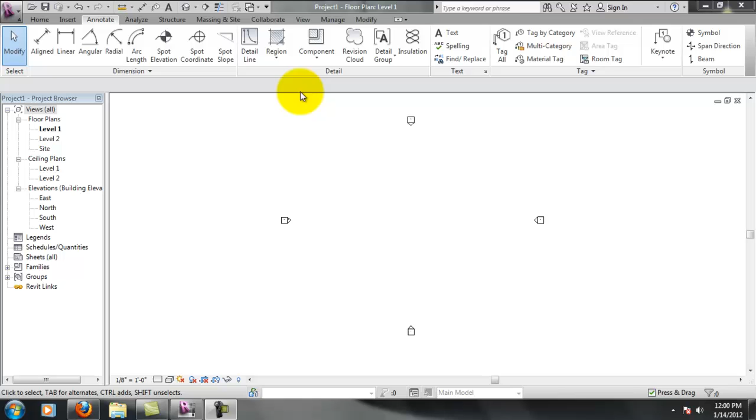So to start off, we're going to create our grid. Like I said, interior designers often won't have to create a grid, but there's going to be a grid to work off of. So as long as we're in this class, we'll probably always create a grid just to get familiar with it.

So I'm going to create some lines here. Let's see, I need... need 7 total. It looks like we only have 6 so far, so I need 1 more. There we go. So I need 7 this way.

We'll space them later. One thing I want to point out is this elevation marker needs to be pulled out now that I've expanded my workspace. So it's good to not get that trapped inside of your space. It's just, it's not a good approach.

You want to pull these guys out here, kind of align them again to recenter. We're probably going to have to move these once we add the other horizontal ones, but for now I'll just get them there. So this doesn't have to be perfect, right?

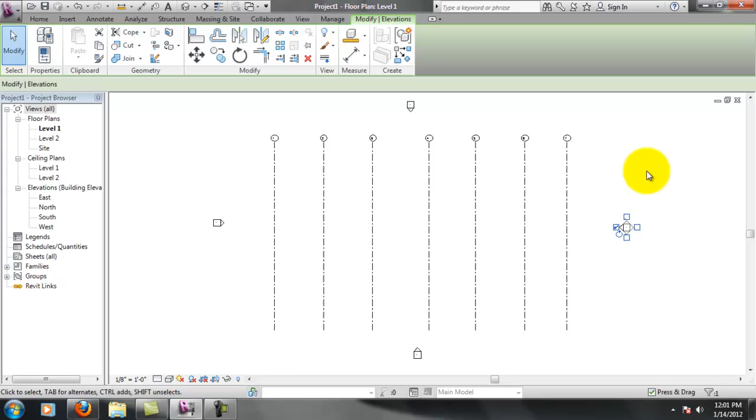Because an elevation, if let's say that this was a wall, an elevation marker is going to show the length of this wall no matter where it is, and it's not going to be offset. So technically I could have this here and it would achieve the same result as being in the center. However, drafting standards make it to the point where you kind of want to keep things nice and neat and in line.

And you can see here by selecting the triangle, this tells me where my view starts and ends. So anything within this area is going to be seen, and we'll focus on those a little more later. So I've got 7 of these here. I'm going to go ahead and space them.

Remember, with the first grid line, you're going to just go ahead and pin that in place because we don't want it to move. So everything's going to be based off of this point. I told you before that Revit doesn't have a coordinate system. So if we pin this, let's just go ahead and say, hypothetically, now this is our 0 on the x-axis, okay? This is our 0 point because we're basing everything off of this point.

So now I can come in here and I've just already decided that I'm going to make these 25 feet. And then I'm going to pin the second one so that it doesn't move anymore. And I'm just going to go down through here and make these 25 feet. Make sure you pin them.

I know it's hard to remember to do it because I still sometimes get in the habit of keep moving and I'll forget to pin stuff, but you really want to make sure you lock stuff in place after you create it. Either pin it or lock it.

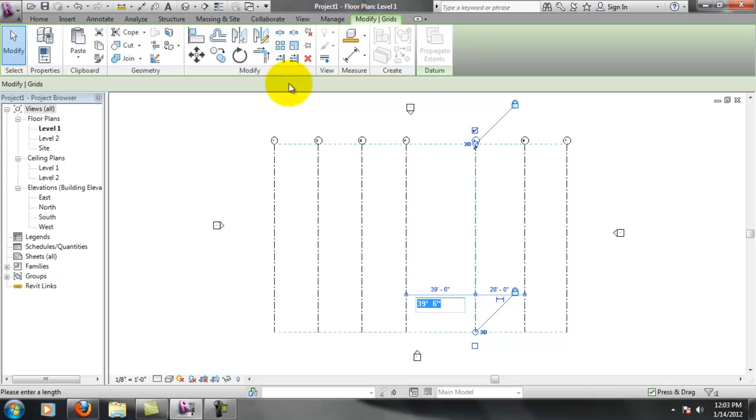All right, see, I get that one. So there's one thing here that I don't like about my bubbles, and it's not necessarily wrong, but it's also not necessarily right.

That's going to depend on who you work for. But I like the bubbles to be along the bottom and up the right side. So I'm going to select each one of these and hit my check mark. Remember to bring my bubble down here, and then I'll uncheck the top one. So you can see that moves my bubble down here, which is a little more easy to read, I think.

So I'm going to uncheck all of these and go down through here and move these down here. Oops, let me get that guy there.

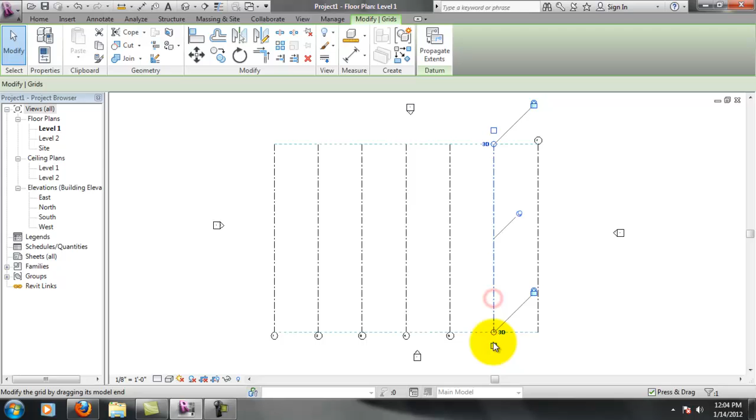Alright, so we've got these set up now, 1 through 7. They're spaced correctly, so now I need to go ahead and do the horizontal ones. And to keep this project simple, we're going to work with a square building.

So I'm just going to go back through and do the same thing and create my horizontals here. So grid lines again. This time I'm going to make sure that my bubble is placed correctly on the right side, so I don't have to go back through and check it. I wanted to show you that you can do that if your bubbles are on the wrong side. It's an easy fix, it just saves the extra time by going this way.

Now also notice these are counting numbers. In order to save even more time, I'm going to undo these by hitting Control Z. Control Z is going to back me up to this step.

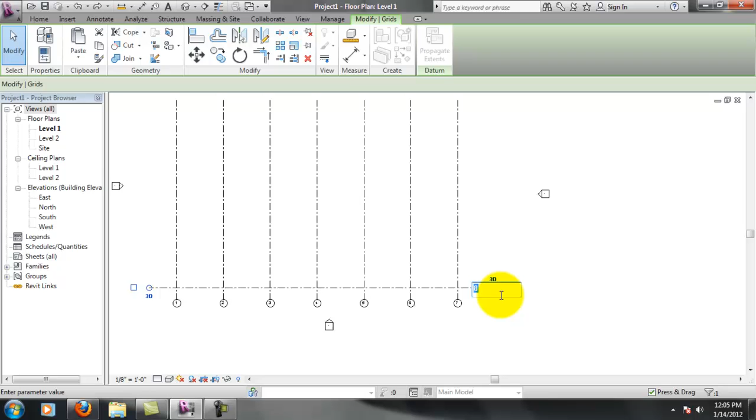Right off the bat, I'm going to go ahead and name this, I'm going to give this the letter A. And now I'm going to actually start again. And you'll see why I decided to name the first one A.

If you remember from last week, it's going to automatically go with letters now. That way I don't have to click on each bubble after I'm done creating these and change the letter. So by undoing it and stepping back there, it kind of saved us a little bit of time.

One more. Okay, so now I'm going to go ahead and make this grid line. I'm going to pin it in place. Okay, so now I've pinned this in place and I've pinned this and this grid line here in place.

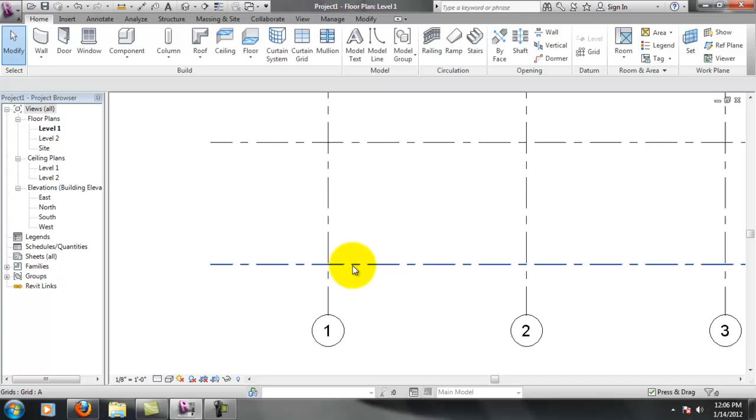So technically, you can consider this for your drawing. Now you're not going to be able to ever enter any coordinate numbers or anything like that, but for your own reference, think of this as 0,0, where these two intersect. This is the corner of your building, or what will be the building. And these are also locked in place, so we can assume that every dimension that we do from here on out is actually going to be based off of these two points.

So yes, Revit doesn't have a coordinate system. Yes, we can kind of create our own here in our own little relative world as far as the rest of this drawing is concerned. And that's one of the good things about grid points.

So we've locked this in place. We're going to make these 25 feet. Remember, you pin it after you move it. This will be 25 feet.

It looks like we're going to overlap here. I need to pin this one. I'm just going to kind of move these, click and drag. Alright, as I get this one, we got this one, so this next one, 25 feet, same thing. Pin it.

Okay, we're going to move this. Click and drag to move them. We want to make sure that they stay in line here at the same time. We don't want to get anything out of order. We want to stay nice and neat. That's the idea of a technical drawing, is to stay nice and neat.

Looks like I forgot this guy here. Now, the beauty of this is I already locked this 25 feet. Well, I pinned it, I didn't lock it. So we're still going to have to unpin that if you've pinned it. And you're going to have to move this one and then pin it separately. I was going to say if I had locked the dimension, it would move with it, but I didn't take that approach. I actually pinned it, so we'll have to redo this one.

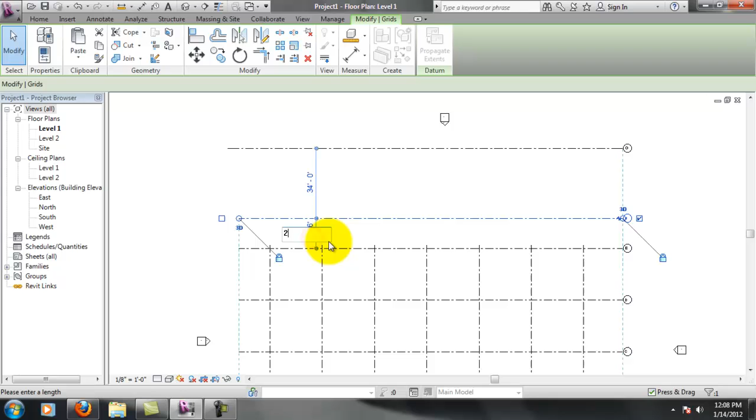All right, so we've got these pinned in place. Obviously these are showing up a little short, so what we can do here, if you remember, I'm not going to be able to drag that. I need to drag it, but if we've pinned these in place, it's not going to let us do that. So I'm going to select all of these and unpin them for a moment.

And I'm going to select this first one again. Now you can see when I select this first one, there's a dashed line that comes across here. That tells me that if I move this one, it's going to move all of them, which is good. That's what we want. So I'm going to move that up so that it overlaps a little bit. Doesn't have to be a lot. That'll work. And then remember, after we do that transition there, we need to select everything again.

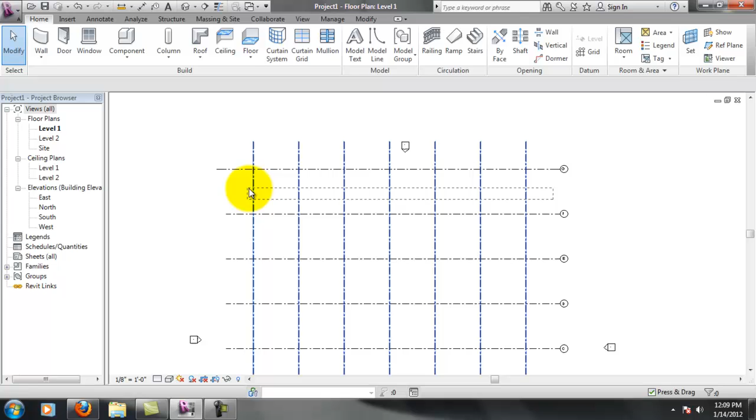I did that by dragging a box across all the elements that I moved, and I'm going to pin those again. By selecting everything at the same time and hitting pin, that'll let me drop that pin there.

Now I need to move my elevation marker here out of the grid. I'm going to select this and hold Control and select this other one, and move both of them at the same time. Let me zoom in there. Move this over to here, just to get it out of the way a little bit.

And you can see here on this right side, this isn't lined up here, and we want to make sure that that stays nice and neat. So I'm going to unpin this first one and move that over to the dashed line. Shows me that they're all in line, and then I'll repin it again.

Alright, so this is our grid line. You should have your grids 1 through 7, and then A through G, and that should be nice and neat. Your elevation markers should be somewhat centered and a good space away. You want to keep those out of your grid — they'll get in the way later. So the next step, we'll come back and focus on starting to create some exterior walls here.

Alright, so we have our grid lines created, which is good. This is going to give us our reference for where our wall placements are going to go.

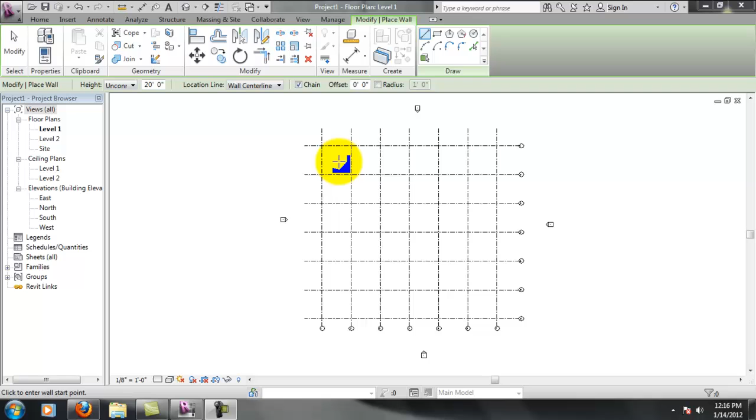So if you remember, to add a level, you can't do it in a floor plan view. If you think about it, it would be kind of hard to add a level in the floor plan view unless you drew some kind of square and specified a distance from the ground, which gets messy. So Revit protects you in that sense and makes you go to an elevation view or a section view to create a level. So I'm just going to pick either one of these elevation views.

These elevation views correspond to these markers. So if I were to double click on this, it would give me the same effect as clicking on the north elevation, the east elevation, or the west elevation. It's important to remember that these elements correspond to the views over here.

It's also important to note that by default, Revit already gives you 2 levels to work with. So we're just going to add 4 levels onto the 2 levels that we already have. I'm going to go to an elevation view.

And you'll see that my grid lines are projecting up, okay? These represent the grid lines that we just created. It looks like our levels actually need to be moved over, so I'm going to drag that over. If your levels aren't appearing on the right side like that, you want to make sure that everything has an intersection here — that would have been bad for that not to be all the way out here.

And also we know we're going to add more levels here, so we're going to drag these guys up. Now remember, they're pinned because we pinned them before, so I need to select all of these and unpin them before I can move them up. So I'm going to unpin all of these again. And it's okay that you have to unpin and pin things.

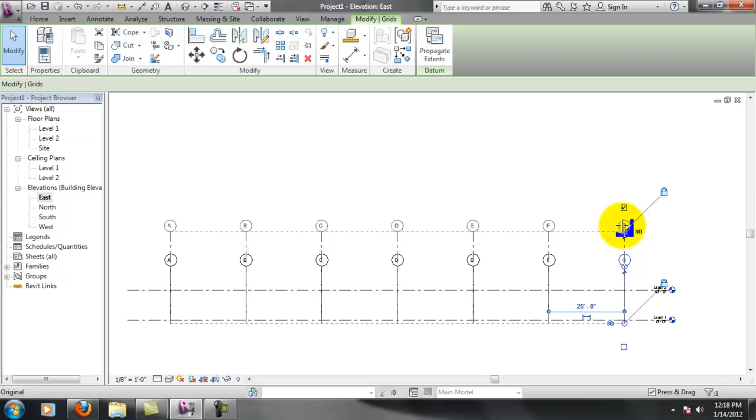That just shows that you're being conscious of what you're doing with your objects, keeping a close tab on being able to move them and not being able to move them. But you just need to make sure after you unpin something, you go back and pin it again.

Now to add a level, I go back to the same place where the grid was, right above grid. Here's level, I can select level. Remember, the first place you click is actually not the bubble, it's the tail, and then you drag towards the bubble. So I'll come over here and drag towards the right. Make sure you get that extension snap there, it'll save you some alignment time later in the future.

Like I said, we're going to go up to 6 levels here, and we're going to have to make adjustments on the height. By default, these are at 10 feet. I actually want my levels to be 12. Well, the first level I think we'll do some kind of opening later, so we'll go ahead and make this first opening 20 feet.

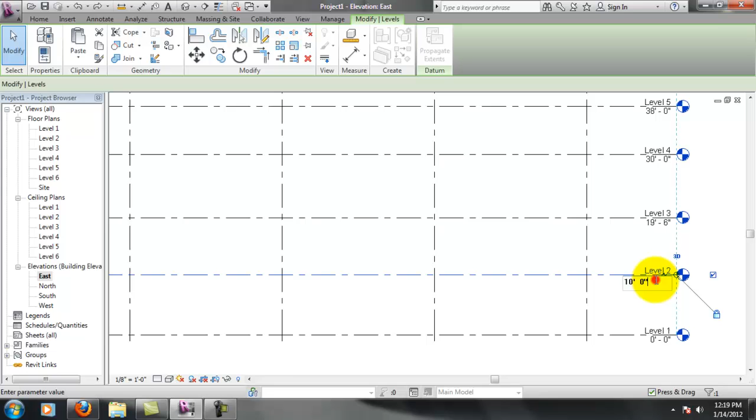And it went over top of our other level there, so you have to be cautious of which one you move next. So I'll drag this one above level 2 there. And it looks like we're going to need a lot more space, so I'm going to click all my bubbles once again, unpin these, and select this first one and drag it up. Drag it up to there, and I'll pin these in place.

Looks like that's the space we're going to be dealing with, so we're here now. This might be alright. I'm kind of just trying to limit the amount of times we have to pin these things, because that could get to be kind of tedious and unnecessary. So I'm just going to drag these up here and space them so I don't have any overlapping issues later.

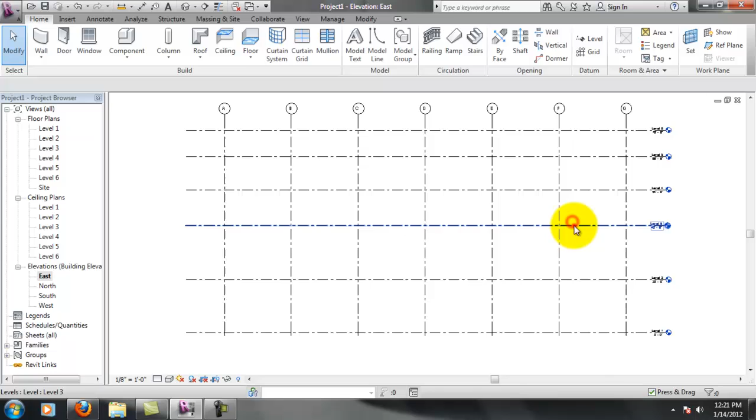Alright, so my first one should be still at 20, and it is. After I get it at 20, I need to pin it. Remember, we need to pin our levels as well. And this next one, from here on out, we're going to stick with 12 feet in between these. So I'll nail that at 12 feet and pin that. And 12 feet, pin that. 12 feet and pin that one, and then last but not least, 12 feet and pin that one.

So I'm a little high on my grid lines, we can clean these up here later on. We might add more levels, we might not. We definitely know that this isn't the final drawing, so as far as this overhang and this overhang is concerned, I'm okay with this. Plus we're going to have some walls added on level 6, possibly, so we'll leave the overhang here quite large because we don't know where we're going to go with this. Other than that, everything looks pretty good here. I want to make sure everything's pinned before I move on, and it is.

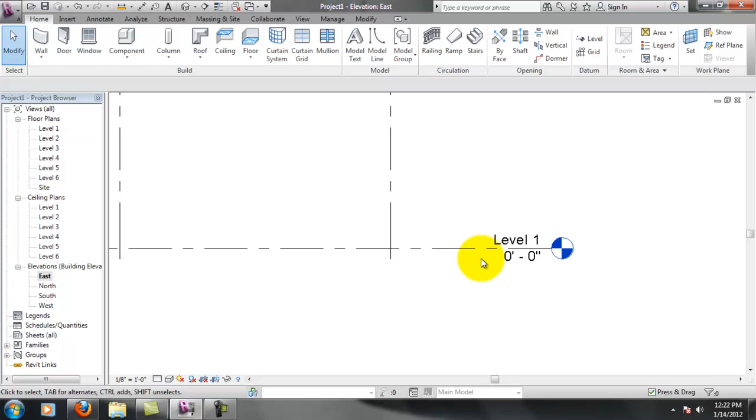Now let's take a look at these datums. As you can see here, level 1 corresponds to level 1 over here in floor plans, and that tells us that right now we're at 0 feet, 0 inches. Now if I select this line, we have more options. Obviously the checkbox is going to control the datum. Remember how we had our grid lines? This checkbox does the same thing. So if I turn that on and off, if I wanted to put the datum on the other side, I could do that.

This guy here creates a break. If I had a bunch of levels that were close together and I needed some space, I could break the line there to bring that out. If I want to bring it back, I just drag it up until it's straight again, and that'll reset that. And this little circle moves it forward and back, as we experimented.

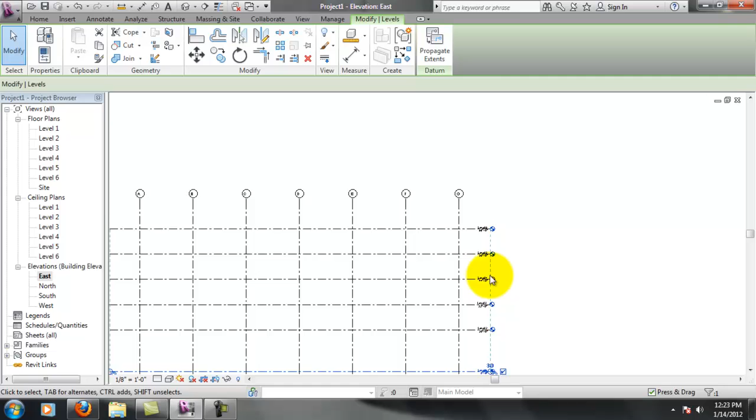Now, because of the naming system, it's going to automatically name levels 1, 2, 3, 4, 5, and 6. And the dimension underneath it corresponds relative to the ground level, or level 1. So this level is 68 feet from level 1, and so on and so forth. These dimensions correspond to the dimension from this level to here, so 20 feet from here down to level 1.

This is 32 feet from level 3 to level 1. So it doesn't have to do with the spacing here, it has to do with the spacing from the level to the ground level, or level 1. And we're actually going to go ahead and rename this level 1 now to ground level.

You can do that by clicking on the tag and just typing ground level. It's going to give you this message: would you like to rename corresponding views? What this means is I've renamed my level 1 here, but I have a level 1 over here and a level 1 over here that correspond to this level. So if I rename this, Revit's asking me, do I want to rename everything that corresponds to it?

Obviously your answer here should almost always be yes, because you're going to have things named differently that correspond to the same level. So when you get this message, 99.9% of the time you're going to want to just hit yes. And by doing that, you'll see that it renamed this level to ground level and this level to ground level. So we're staying organized here by making sure everything corresponds to what it should.

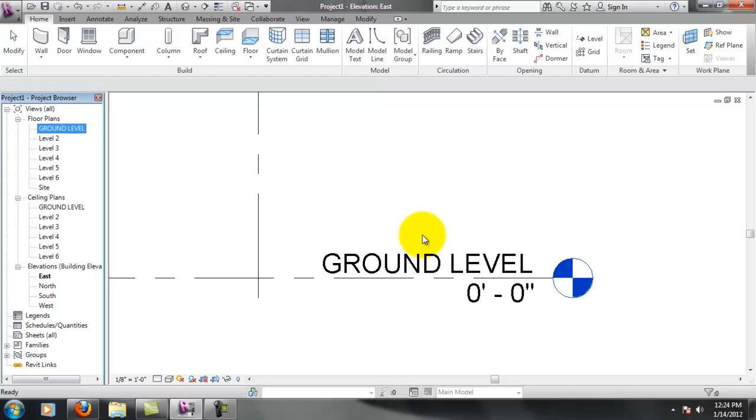I think what I'll do, I'll actually name this, it doesn't really matter, we'll name it ground floor for now. So ground floor, ground floor, ground floor. And we'll go through here and name this first floor. This is actually, we were thinking about putting a mezzanine in. We can rename these things later. We'll just name that first floor for now.

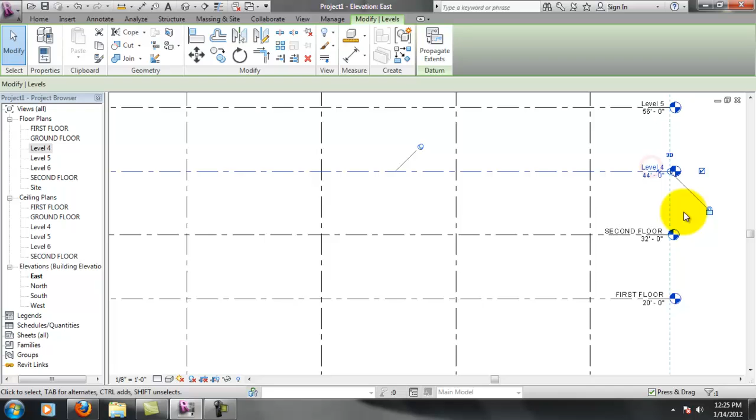Second floor. Notice as I go down through here, these are renaming. I could just as easily say that I want my third level, which is actually, I have a ground level, first floor, second, so my numbers are off, so I want my level 4 to be the third floor, right? So instead of clicking on the name here to rename it, I can just as easily come over here and hit rename, and rename this third floor.

Enter, and that's going to ask me that same question, and you'll see here that it automatically updates. So these guys are linked, the names of these things, the properties of these things. The names in the project browser represent the objects out here. So either way, the next one, we'll name this fourth floor.

And yes, and you'll see it updates that. And last but not least, level 6 is going to be the 5th floor. So this time we'll rename it out here, maybe.

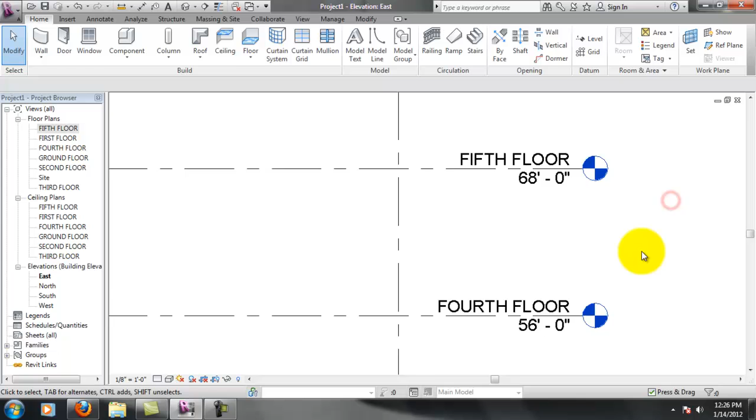Okay, so we've renamed our elevations now. We've renamed our floors over here. This will allow us to easily navigate, since we are starting with the ground floor and not a first floor. Now we know what floor represents what, and we don't confuse ourselves. So we pretty much took the time and set up the drawing with grid lines and levels ahead of time. So now when we need to draw walls and elevations and such, we know where we're headed. We don't have to stop and think about wall heights or anything like that. We know exactly where we're headed with this skeleton type system of grid lines and levels.

Alright, so we're ready to add some walls. We've created our levels, we've created our grid line. I'm going to go to the ground floor. And our grid lines, everything's still in order here. Everything looks good. Everything should still be pinned. Everything's left right where we put it. So looks like we're pretty good there.

So to add the walls, we're going to go to the wall command. And Revit is actually doing a good job to tell me that I haven't saved it. So if you haven't saved it, this reminder will come up at certain time intervals. You can change the time intervals here by setting reminder intervals. You can go ahead and save the project, or you can save the project and set reminder intervals.

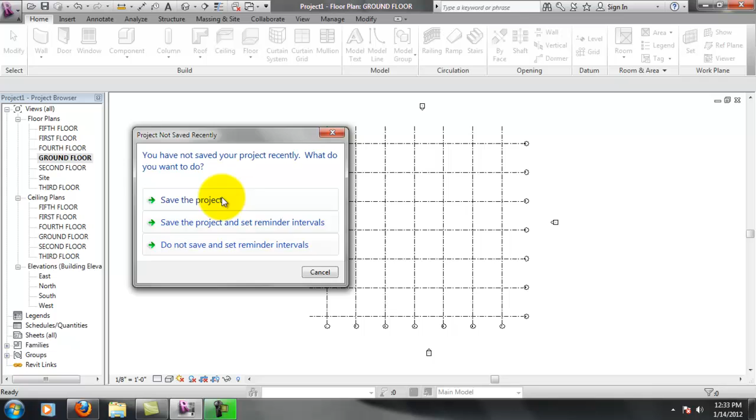So I'll go ahead and save this project now. Let's see, we will save it in... and hit save there. Okay, so thank you, Revit, for saving me in case the computer crashes.

That's always helpful. It's always good to remember to save every once in a while, but when you're having so much fun, it's hard to just stop and hit save every once in a while. But try and hit save as often as possible.

Especially when you're working on public machines, you never know what kind of shape they're in. Any computer in general could just crash at any given time, so it's important to save as you go along.

Moving along, we've selected wall. If you remember from last week, whenever you go into a command, your Modify tab turns green, and it highlights the screen green anywhere that has to do with a property for this wall. All of this has to do with creating a wall, and we'll hit all of it throughout the semester. The most important areas are this green bar here, and for the wall command, what's going on in here.

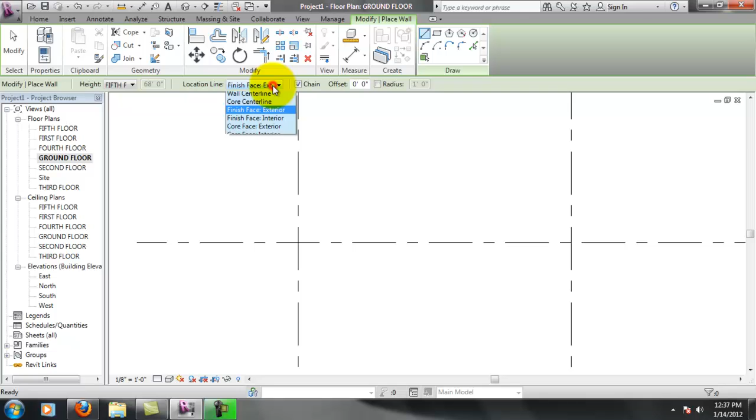For this project, I've already sketched out on a piece of paper the way I want my walls to go, so I'm just going to trace around here. I've made it nice and neat so they happen to connect at certain points. Follow along best that you can.

One last thing you're going to want to check - I close my properties, not because I don't like my properties, it's that I don't like the properties window taking up my screen real estate. I do like my properties, obviously - properties are what control everything. I just don't like them on my screen when I definitely don't need them.

Right off the bat it tells you what kind of wall you're drawing. If you select this, it will give you a list of what are system families of walls, and these can be modified. You can create your own off of existing ones if you want to.

You can't get rid of these wall types. These are there by default, they'll always be there. You can see we have exterior walls to choose from here, which would probably be what we want to use later on when we're a little more experienced. But for now, we're just going to stick to the generic 8-inch wall, to represent our exterior wall.

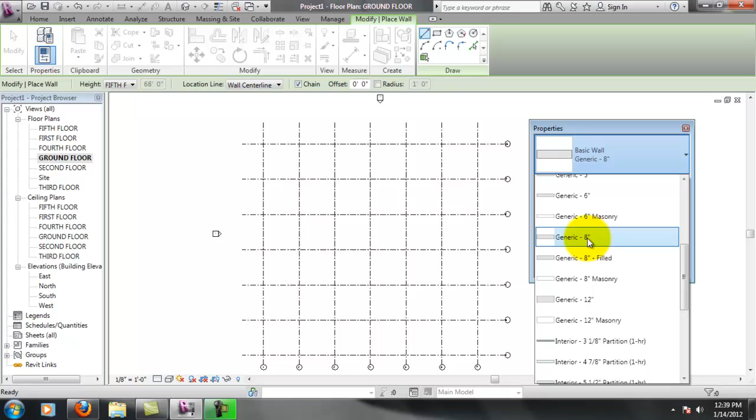You can also see there are some interior walls here, which we'll start to use later in this video when we get to the inside walls. So for now: exterior walls, generic 8 inches. This other stuff is okay by default for now; we'll come back to that later.

So I'm just going to start drawing my predefined shape here. This is a rather large building, so I decided to do some ins and outs for the exterior shell.

If you can imagine the way I pictured this building sitting, maybe in a downtown situation where it's set back from the sidewalk—so you have your city sidewalk, and this is a corner of a major intersection or something. That's the kind of context we'll be looking at for this building throughout the project.

Later, once we learn more tools, maybe we'll sketch the site in, depending on the time frame we have. For now, we'll focus on the insides of the buildings, which is the most important part for us.

Obviously nobody wants to walk up large amounts of stairs, so I decided to throw in a small shell here with a couple of elevator shafts. We'll put those in the center here.

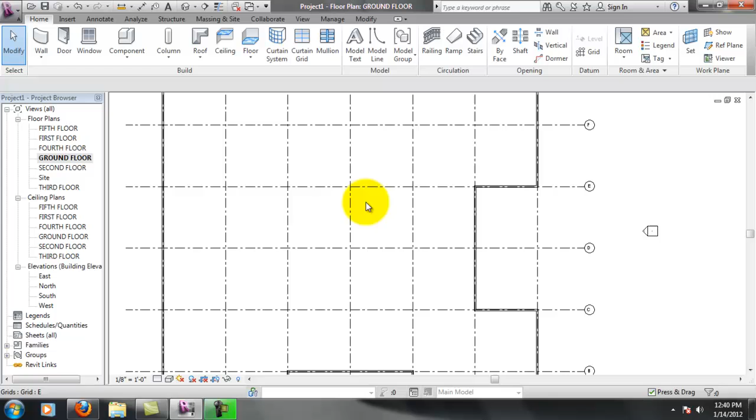Again, I'm going to use the same wall type, the generic 8-inch. You'll see, because I have it on wall center line, that's spacing the grid line in the middle, which is okay for what we're doing here—that's what I want for this drawing. So there you have it: the exterior walls and the shell.

Now, because we set the height right off the bat to the fifth floor, if we jump over to an elevation here, you can see that wall goes all the way up—the core in the middle and that exterior shell go all the way up to the 5th level.

The wonderful thing is, if I decide to budge this—if I unpin and select my level here, and change my height to 70 feet—you'll notice the walls go with it, because when we said we wanted to go up to the 5th floor, Revit automatically locked those walls to that level. So now whatever happens to this level, the walls move with it.

This is considered parametric data, and it's one of the strong things about Revit when it comes to families and linking things like grid lines. In AutoCAD, you couldn't do that—well, correcting myself, the new AutoCADs are introducing parametric data, so I can't speak for how strong that is yet. Revit was definitely there before AutoCAD with parametric data, so wherever I move this 5th floor, as long as these walls are connected to it, they're going to go with it.

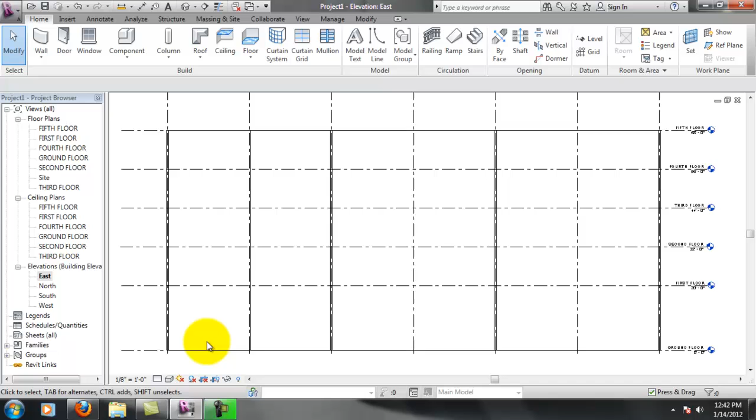Now, for the sake of introducing you to the program, I'm going to go up to View and hit 3D View. That gives you a default 3D view of what you've created so far, and it's good to keep checking back here to make sure you're getting the results you want. Once you create that 3D view, it drops into your project browser under the 3D View tab. You can rename these as well, and it's good to do that because you'll end up with probably 40 or 50 3D views when it's all said and done.

So it's good to keep an exterior ISO, maybe for isometric, and just make sure that this view always stays exterior ISO.

You kind of have to be on yourself, that way whenever you have a bunch of views, you can come back and refer to this exterior. You can rotate and pan. I'm panning by holding the middle mouse button. I'm holding Shift while I hold the middle mouse button and move my mouse, and that allows me to orbit around this guy and take looks at different perspectives.

So you can see the mass of the building using the quick 3D views. Now this isn't considered a perspective view by any means. You'll create perspective views using cameras, but these give you basic isometric views of your orthographic elevations. So it's a handy tool to use.

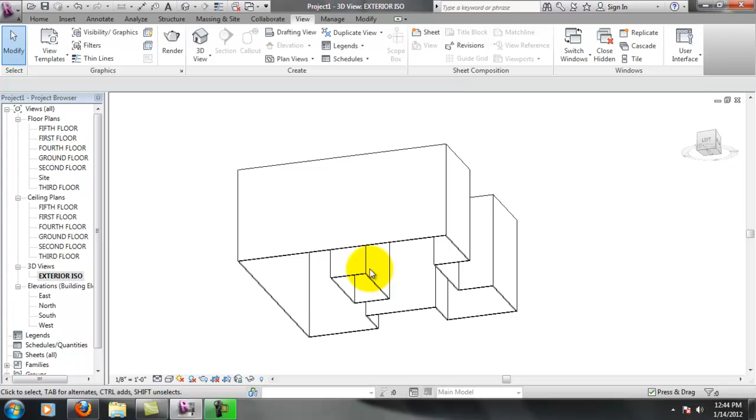So jumping back here, also notice while we're in this 3D view, we have no floors yet. We haven't created a floor. So when you create walls, it doesn't automatically create floors for you. Floors are separate objects that need to be created. So that's why you can see through the entire building.

Now, if we had started creating floors on each of these levels, we've only created the grid lines for these floors. We haven't actually created a floor by naming this floor. It's important to realize that these are just names of grid lines, reference points. These do not represent actual geometry. So when we look at this 3D view, we're able to look all the way through this building because we actually haven't created a physical floor yet. And that'll be our next step.

So I'm going to go ahead and jump to ground floor. And I'm going to go to the Home tab, and I'm going to find floor, and there's floor. Now these arrows represent things that are, in addition to floor, you have structural floor, floor by face, and slab edge. And each one of these will have different elements that pertain to it. But for now, we're just going to worry about just clicking on floor.

Just like the wall, we're getting a modify tab here that turns green. So everything that turns green has to do with the floor command. You can see there's not a whole lot going on here like there was for wall. We only have the offset tool. The most important thing about the floor tool here is the selection type.

Now this tool allows you to select walls, and if you select walls, the floor will be created for those walls. And it's probably the best way to go about doing it if you actually have walls, because that'll lock to your walls. So I'm going to select all of my walls here that I want my floor to be part of.

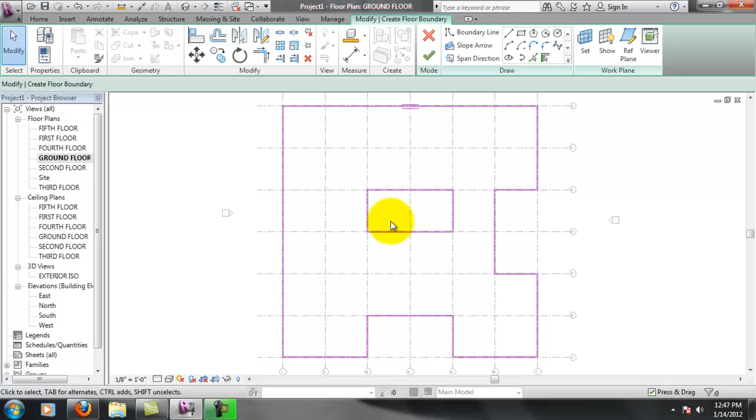Now I want to go around and make sure my floor is in the correct location. Now you can see if I were to say okay here, my floor is actually going to be within my walls, and this is also going to come down to construction details on how that's going to be constructed. Luckily we're not going to have to worry about that too much. But for the sake of this, it makes sense for your walls to sit on top of your floor. In this case, your floor is actually going to be attached to the bottom of your wall, which, if this is a slab of concrete, is not correct.

The correct way to go about it would be, or if your CMU block or whatever would be there, the floor would rest on top of that and butt in, depending on the detail. And then it would go up. Either way, we're not going to create a floor that ends on the inside of the wall like that, because from a practical standpoint, it doesn't make sense on how that would connect. So, especially for the ground floor, we're going to need to bump that out to the other side.

So if I select the line, you'll see these little arrows here. And if I select that arrow, it's going to flip it to the outside.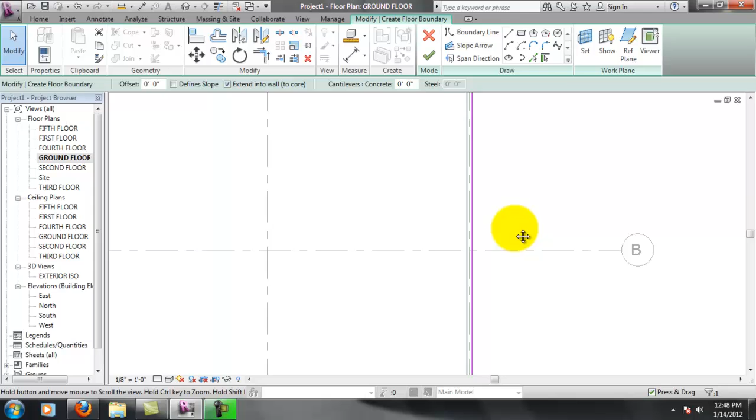Flips that whole chain to the outside. So now my walls rest on top of my floor, which in this case makes more sense than the other way around. So that all looks good. You want to go around and make sure that the whole thing is correct.

Here we're going to need to flip these like that. Okay. Now I hit the check mark to say okay, and that drops a floor in there.

So now if I go to my 3D view, you can see there's a floor that was added onto the bottom here. Now we only added a floor to the ground level because that's the level that we drew on. But now if I go to the bottom, obviously I can't see through because that floor is now there as a barrier in the view. So that is the addition of the first floor there.

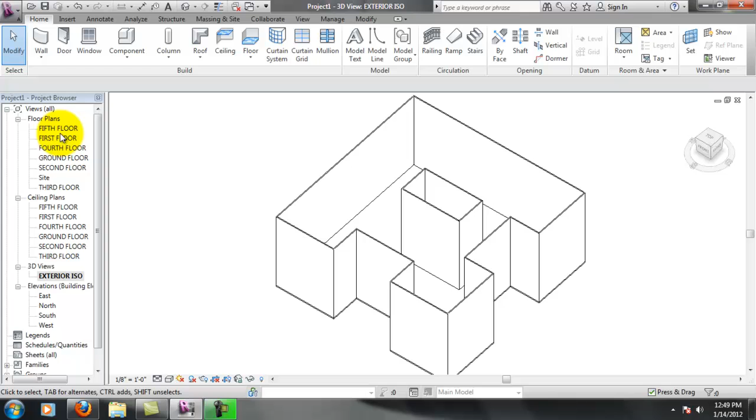Now each level is going to need its own floor, so you would go to your next level and do the same idea. So I would go to my first floor and do the exact same thing.

Now, when I select these floors, I'm selecting a generic floor. Remember, I closed my properties box because I don't like it there. For you, you might want to keep it open so that you can see what floor you're actually drawing. So I'm drawing these generic floors for now, 12-inch floors, and that's fine for now.

We're going to go back through and change this. But if I wanted to change it before I drew it, I could come in here and select a more detailed floor, such as a wood truss. Oh, this is a commercial building, so it's probably not going to be a wood truss. And we're not going to do vinyl, so we're going to probably have to create our own floor types as we go along. But the option is there to select a floor, but for now we're going to work with these generic 12-inch floors.

And this time, just to show you, I'm going to use a different method for creating my floor here. I could pick my walls, but I'm actually going to use the line tool. And because I'm on the inside of my wall, I'm not going to create the floor to the outside. This time I'm going to create the floor to the inside.

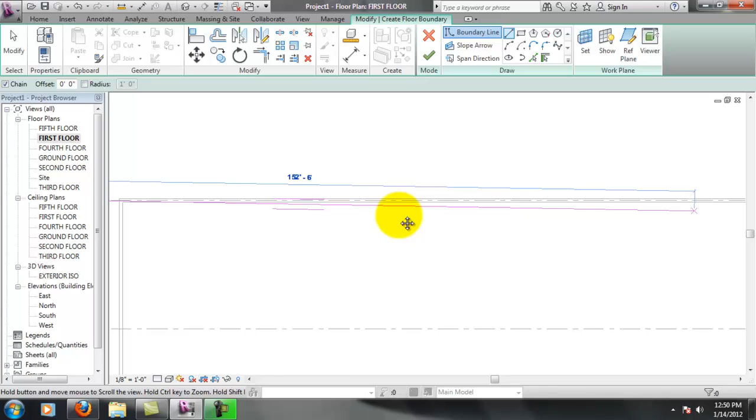And I'm doing this by drawing lines, snapping, using my middle mouse button to scroll and zoom. And I'm just going around and creating lines. Obviously, it's much easier to just select your walls to draw these. But to show you that you could do it this way, I wanted to kind of prove the point. So I'm just going to go around here.

Okay, and since my core here is a rectangle, I'm going to change my tool up here to rectangle. And on the outside this time, I'll select that.

Now these lock tools are important when they come up. If I was to resize the core, let's say if I didn't lock these and I come in and say, well, I want my core to grow up 2 feet in all directions—if I do that without locking these, the floor isn't going to move with the core. If I want to lock my floor boundary to the core, so if I change my core, the floor goes with it, I need to lock these.

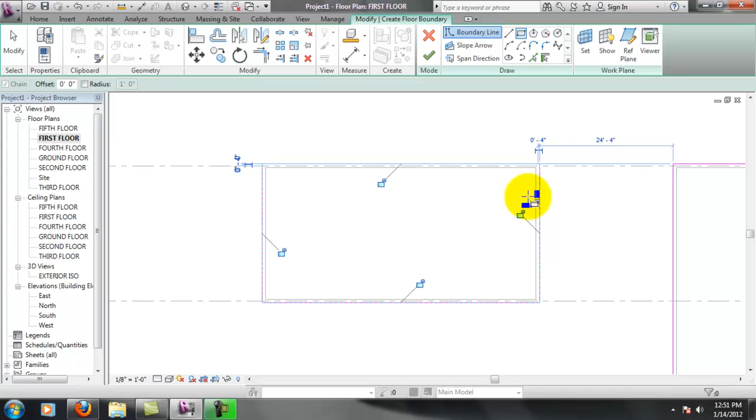And we'll see the importance of that as we go along, locking this stuff using the align tool. So for now, we'll lock those. That way, if my core changes, my floor will change with it.

So I can hit the check mark to say I like that, and if I go to my 3D view now, I'll have 2 floors here. So let's see.

Obviously, it's going to be really hard to see both floors, so to get by that, we create a section. This is another amazing thing about Revit, the ability to create sections with ease. Remember, in AutoCAD or even drawing on boards, sections can be a pain, as well as any elevation. Revit does that all for you automatically, once you put the work in up front.

So to create a section, I'm just going to go to any floor here, it doesn't matter necessarily, and the ground floor. I'm going to go to view, section. From section, I'm just going to drag, let's see which way would be the most interesting. I could do a diagonal, but we'll keep it linear, so I'm going to cut through the core.

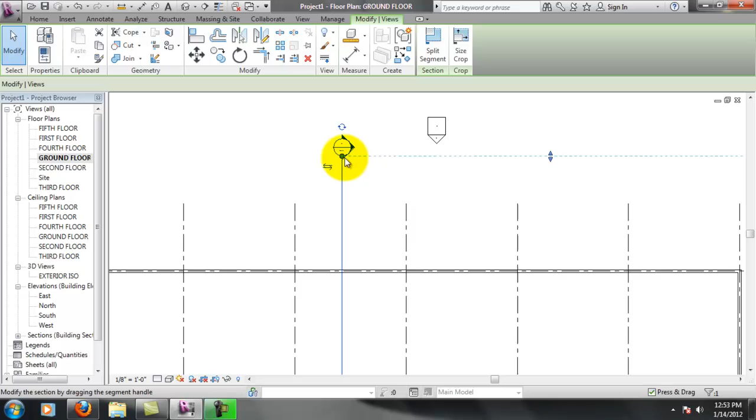We'll go ahead and just cut through the core here, just like that, and it'll give me my default bubble. You want to keep these nice and neat as much as possible, so I'm going to drag this a little bit closer. I don't need it to overhang that much. And technically, I can put that there.

Okay, so I've created a section view. Obviously, anytime I create a view, it appears over here, and here's my building section, section 1. I could double click on that, or I could double click on my arrowhead here, and it'll take me to the same place. So there's my section of the building.

You can see here's the first floor that we created, right, the 12-inch floor. Notice that the floor is created on the level, so when I create my floor, the actual extra 12 inches goes down, which is why if you want at least a 10-foot ceiling, you have to allow these levels to be 12 feet, because you're probably going to have a drop ceiling come down here, so even 14 feet might be better. But you need to allow for the thickness of your floor on your other levels, if that makes sense, because otherwise you're cutting into your space.

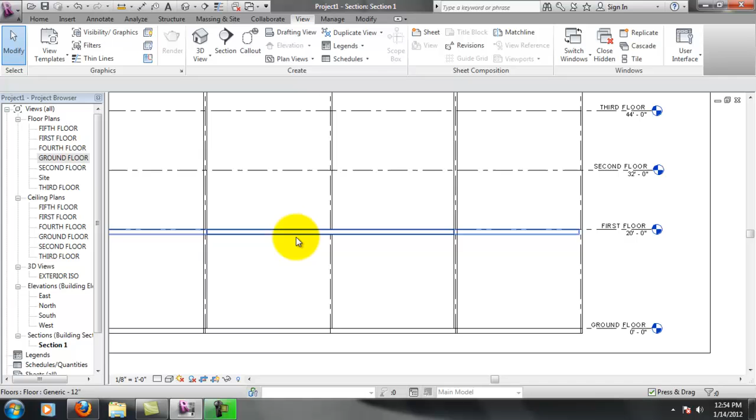So there's my first floor, there's my ground floor, there's the shaft for the elevators. I'll start to go through and create these other floors, and I'll see you back here when that's done.

Alright, I hope you had fun clicking each wall, making sure everything was inset to the inside. I saved this last floor. There's a couple issues here I want to point out. The main thing I really wanted to show you, I haven't created a floor here yet, and I wanted you to go through and practice clicking. What I did not show you was how to do it even faster by using the chain tool. So for this last floor, I've saved this here to show you.

So what we're going to do is select our floor tool like we did before, and make sure that our select wall tool, or pick walls, is selected here. Now when I hover over this wall, you can see it kind of turns blue, and down in the lower left hand corner of my screen, you'll notice it shows that I've selected wall, basic wall, generic 8. So it's showing that I'm hovering over this wall. I haven't actually selected it yet. Revit's really good about selecting what's called chains, and objects underneath other objects, by introducing the tab key.

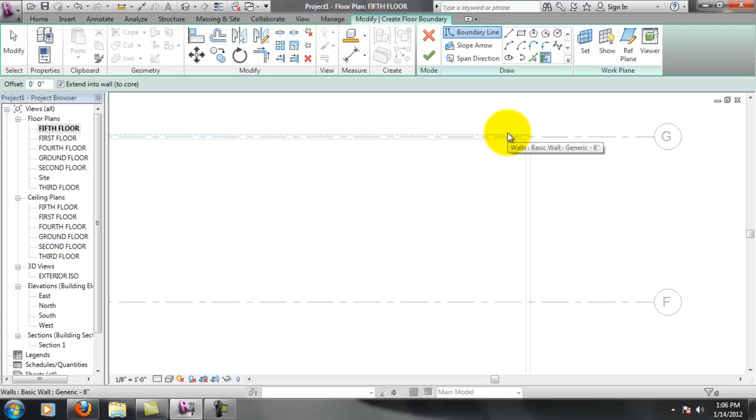So the idea is, if you have a wall that's connected like this wall all the way around, this is considered a chain. When this is selected all the way around, you can hit tab while hovering over any of the wall segments, and now if you look down in the lower left hand corner, this little thing that just came up says I now have a chain of wall pre-selected. To select this, I still have to left click, and if I left click, that's going to select all of the chain around that wall for you, so you don't have to click each individual segment.

And we're going to use the tab technique here. I'll do it again on the inside. Actually, first, before I do that, you can see that this is on the outside. The only wall that should be on the outside is on the ground level, so I'm going to flip that to the inside. Make sure that all of your levels are flipped to the inside.

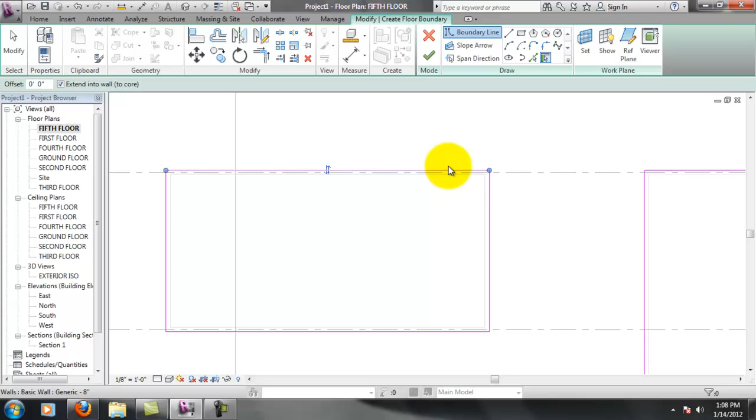So, yeah, that's all good there. Here I'm going to hit the tab key again, hover over one of the wall segments, hit tab, and then click with my left mouse button. That'll select the entire chain without having to select individual chains, so that's another shortcut. And this should be on the outside of the wall, so that's good there. And I'll hit OK.

If you get anything about attaching, for now we're not going to attach anything, so you can hit no. If you've been getting this warning and you hit yes, it's okay, but for now I'm going to hit no.

So that gives me my 5th floor. I'm going to give you a second to look at this and see if you can figure out what's missing in this picture as opposed to this picture. Okay, let me get this. We've got this picture. Look at this picture for a second.

Go back to the 5th floor. What's missing? There's something missing here that's pretty important, and it is the grid lines. For whatever reason, in all of your elevation views, you need to make sure your grid lines go up above the highest level. If I go to my 2nd floor, they're probably still there. No, not even my 2nd floor. 1st floor, maybe. Nope, not even the 1st floor.

So what you need to do whenever your grid lines are missing on your higher floors is go through your elevations. The east elevation is what we've been working on the most, and it actually looks okay. North elevation, look at this - your bubbles need to be above the highest level, so that's why they're not showing up on those high levels. So you have to unpin all of them again, which in this mess might be a good time to introduce filters.

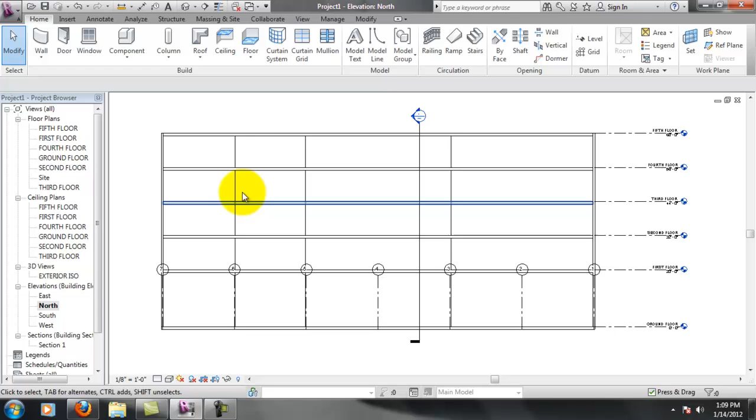A filter is basically an easy way to select things. The way you use a filter is by selecting everything you're interested in, even though you're going to get some walls and stuff in there, and the floors. All we're actually interested in are grid lines. Down here in the right hand corner there's a little filter icon with 9, telling me I have 9 items selected. If I click on that, I get the options for floors and grids. I only want grids, so I'm going to uncheck floors and hit OK. You'll see that deselects floors and only leaves me with grid lines.

So now I can come through here and unpin these. Filters are an excellent tool to use when you have a huge mess of items, more so than what we're dealing with now. You need to be careful because they're actually unpinned - you don't want to move it side to side like that. You need to make sure you get a hold of the little bubble and drag it up there. After that's all said and done, you have to drag a box again.

You don't really want to pin your section, so use filters again and uncheck views, and then hit pin - that'll pin those back in place. Now if I go to my 5th floor, there's my bubbles showing up there.

So, technically on my 5th floor and on my ground floor, I've got bubbles on different sides. We would need to go through here - I'm not going to do that now for sake of time - need to go through and uncheck these, right? I would need to uncheck all of these bubbles at the tops, and then check the bubbles down here to give my bubble at the bottom. I would want this to be consistent with every drawing, so I'll do that there to remind myself to do it in the off time.

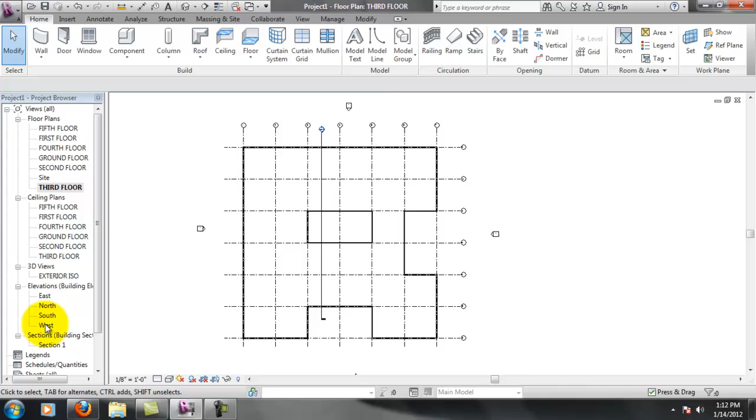I'm going to look at my elevations here and see. It looks like my floors on this elevation are not all the way over as well, so I'm going to drag those. Well, they're pinned - I'm going to have to select my floors here. They're my levels, not my floors. And unpin those, and then move them over.

Really, you have to go through all 4 of your elevations and clean these up. Make sure you do that.

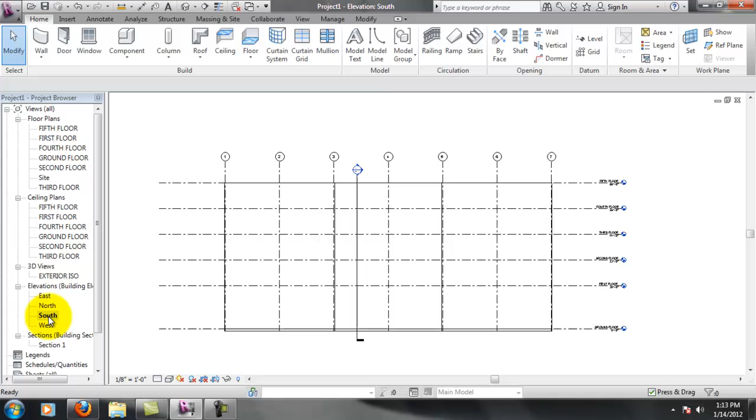Well, these are a little far out there, but I'm not going to worry about that right now. Okay, so back to where I said, the 3rd floor is where we're going to create our interior walls for this project or exercise.

Again, the bubbles are in the wrong place. I'm going to go back and fix that on my own. You should as well. Make sure your bubbles are along the bottom for this project. And for the interior walls, as far as interior walls go...

I'm kind of coming up with just a basic layout here. I'm going to go through and draw these in, and dimension as you go. You can follow along if you'd like. I would recommend it. It's basically really simple.

I'm going to create my wall here, save my project. And this time when I go to my properties, I'm going to do an interior wall, 5-inch partition, 2 hour. Okay, so that's basic wall, interior, 5-inch partition.

I'm on my 3rd floor here. So by my height constraint, if I'm on my 3rd floor, obviously I want my walls to stop on the 4th floor, which by default the height was selected for me. So that's good, that's what I want. So I'll leave that at 4th. Wall center line is good. And that all looks good.

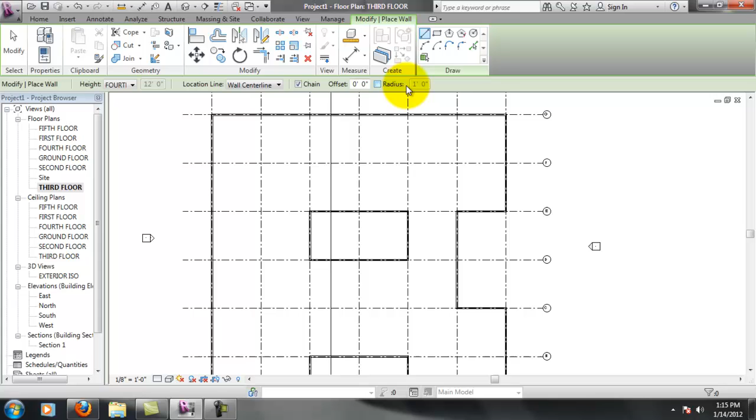So I'll just start drawing in the walls that I had predetermined here. I'm not worried about dimensions yet. I'm just basically drawing the outline. We'll come in and do the dimension stuff later.

So that's the basic layout there. Technically, we should have some columns here, and to be honest with you, I kind of skipped that step, and we'll go back and put the columns in where these intersections go in the next video maybe. Now I just want to worry about getting these interior walls in there.

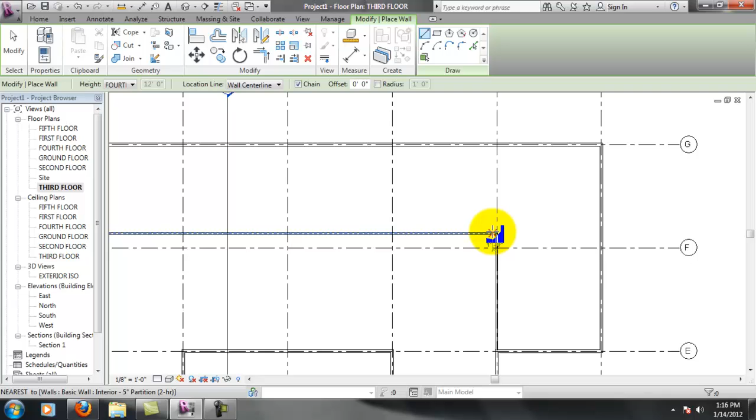So I'm just going to keep adding some rooms. There's no system here to what I'm doing. I kind of just want to get us familiar with drawing interior walls. This by no means has been space planned or anything like that with matrices. It's just drawing some lines and making it look like it makes sense for this video.

And let's see, one more maybe, two more. Just a conference room on this wing here. And I'm going to select this and delete it.

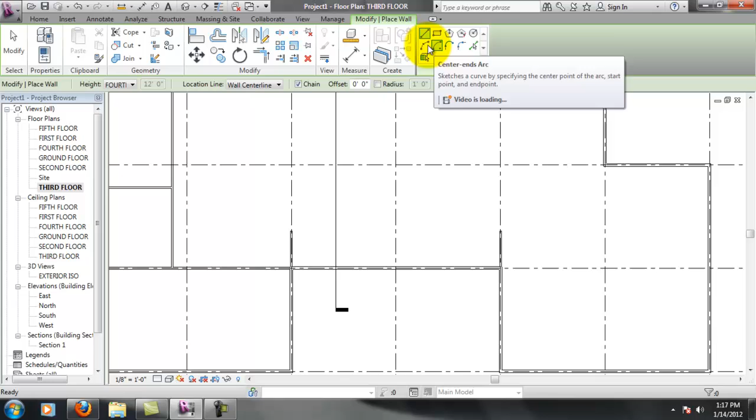And for that hump there, I'm going to go back to wall. I'm going to select start, end, radius. When it's named that way—start end radius—that's the click order. So you're going to click the start, click the end, and then click the radius. I'll just click for now to give it an arc there.

So this is our elevator core. We might have some other stuff going on here. For now, this is good. We'll refine this later.

Now, when I created these walls, you can see we've got little bumps here, and that's because I created it on this grid line. That's fine for the exterior walls, but we don't want that little notch. So what you do to clean this up using Revit is their align tool, and you're going to use the align tool a lot.

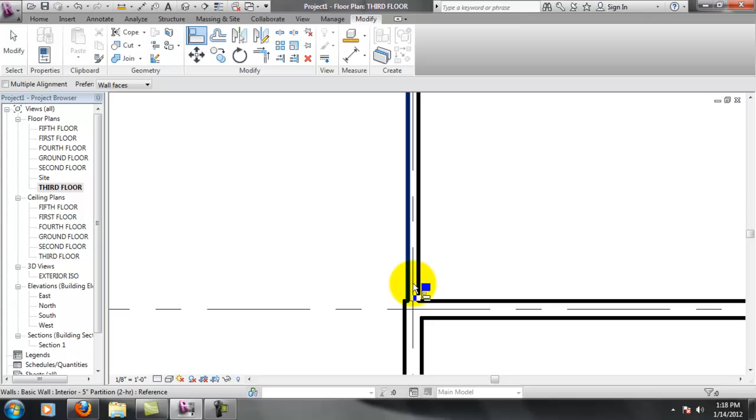I can guarantee you you're going to use it a lot. So if I go to modify, you'll see this align tool right here. It looks like a little bar graph or whatever. I'm going to select that. Now when you use the align tool, the idea is to select what you want to align to first, and then select what you want to align.

So if I want to align this face of this interior wall with the face of this exterior wall, I need to select the face of the exterior wall first and then the face of the interior wall. You'll see that bumps it out there. It makes it flush and gives me a little lock. Whenever you use the align tool like that, you want to lock it after.

A lock is almost exactly like using a pin, but it has to do with the align tool. So now whenever this wall moves, this wall is going to move with it. If I didn't lock it, that wouldn't be the case.

If I want to make sure this wall is locked to whatever happens to this wall, I need to lock it after I do my align. So I need to go through and make sure everything that meets or butts up against an exterior wall is aligned. Here's another good example. I'll select this wall first to align to, then select that wall, and lock it. That'll lock those in place. And this wall with this wall, I'll lock it too. Now I get a nice transition, without little bumps coming off the side of it.

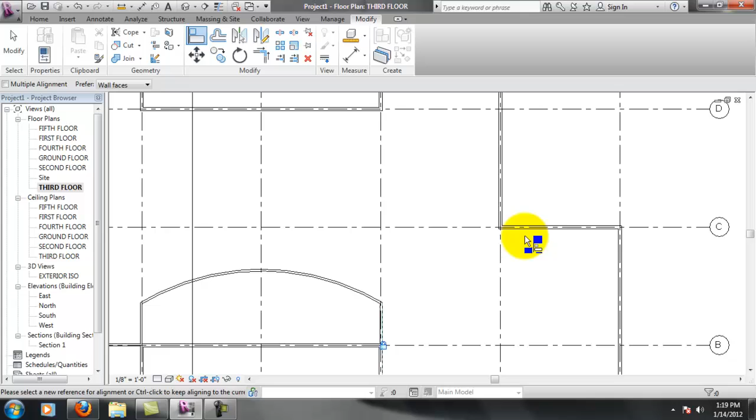There's probably one over here as well, so I need to come over here. Again, select what I want to align to, then select the wall to align, and lock it. Always lock it. Chances are you're going to want it attached to that exterior wall, so it's good to always lock that in place. I think that's all of the ones we've created there.

Now you can use the align tool for other things too. Let's say I wanted this room to be aligned to this grid line, with the inside wall face aligned here. I would select my grid line and lock that. See how that took it over and snapped it to that grid line. And I can lock it, so if that grid line ever changes, that wall is based off of that grid line.

You should use align a lot, like I said. Let's say these rooms are about 20 feet deep, or 21.6 actually, so those are pretty big rooms. We might be able to get away for this project with creating some walls in here as well.

Walls inside a wall, so we've got some sub rooms here for whatever purpose. This could be a big conference room, this could be an exec office with a corner, maybe we'll put some windows over here in the future, and this could be a public area. We've got some huge hallway space here.

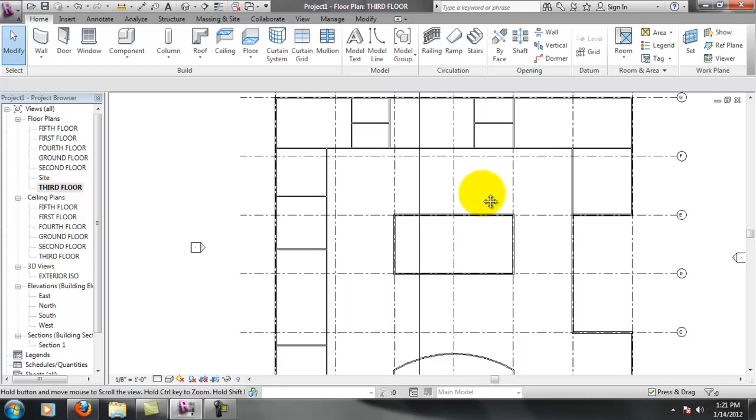Once we decide where we're going to put our elevator doors, we can start building some walls on this core as well. I'm almost positive I want the elevator doors on this side, so we'll go ahead and do that now - we can move it later. I'm going to hit my wall key again, and I'm not going to focus on getting it perfectly placed for now, because we can come back and do that with the align tool. So I'm just going to draw it, rough it in in Revit.

In Revit, you should just draw it, then go back and add the aligns or dimensions. So again, modify, align - I'm going to align that, lock it, and lock that. Alright, so this is our elevator core here.

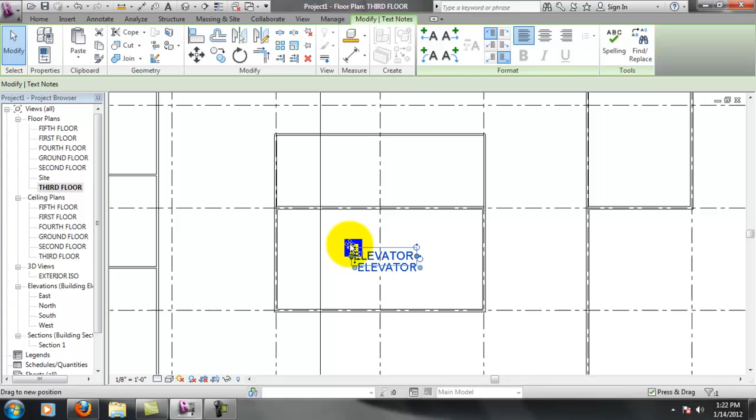We can go ahead, just to remind ourselves for now - this is by no means a room tag, don't consider this a room tag, just a note to yourself: Elevators. We'll change this later with a proper room tag, but since we're kind of designing as we go along, I'll put that in there as a note so I don't create any walls in there and forget this is my elevators.

So we've got a space here, looks to be a corridor. I need to make sure that corridor is legit. So I select this wall here, and you can see from center line to center line is 10 feet 8, these are 5-inch walls. Let's say you didn't want to do the math - you see these little blue dots here? You can drag those out to the face of the wall, if wall center is not selected.

Let's see. I'm going to change my location line here to finish face exterior. You see that moved my dot there. Still seems to be snapping.

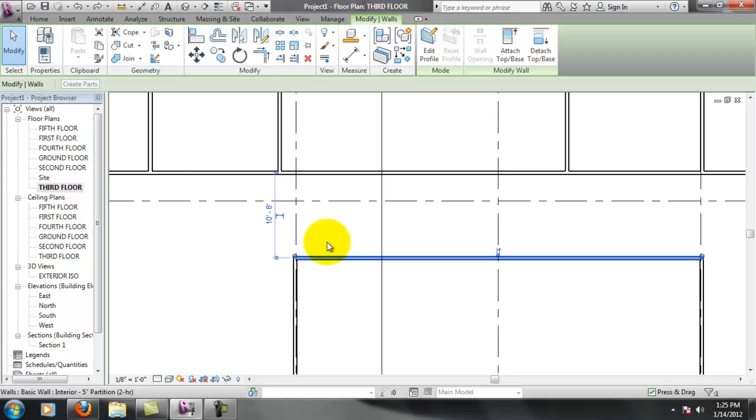At any rate, 10 feet 8 is acceptable for a corridor there. We could even make this a little bit smaller if we wanted to. Let's make it 8 feet. To do that, I'm going to select the wall that I want to move, then select the temporary dimension and enter 8 feet.

Okay, so that's even better. I'll start to actually give these things some actual sizes so you can match it. And I'll make this 15 feet.

Let's see, this is 10.9. I'll make this 8 feet. Leftover should be 13.6. I'll make this 13.6. Make that 8 feet.

Now, let's say I wanted to measure from center to center on this wall instead. This is another good example where you want to use this blue dot and drag it to the center of that wall. Now I can enter the dimension that I know here instead of the one I wouldn't know there.

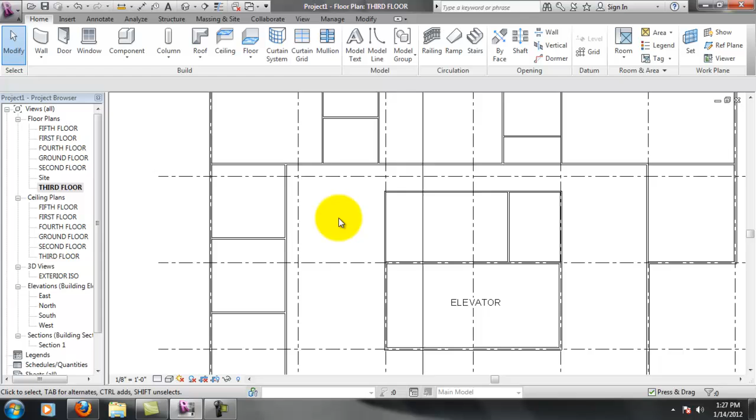It looks like we're going to need to add some wall as well here. So that hallway would have been enough for a semi to drive through, so we'll make that hallway a little bigger.

That one seemed to align okay. This one down here looks like it gave me a little bit of a bump. So use the modify tool and the align tool, and lock it. I need to make sure that my hallways are consistent here. That hallway's 8 feet if you remember, so I'm going to make this one 8 feet as well.

I kind of like the idea of maybe putting an island here for some reason. Maybe this will be the frame for some cubicles. So what I'll do here is again come with my wall.

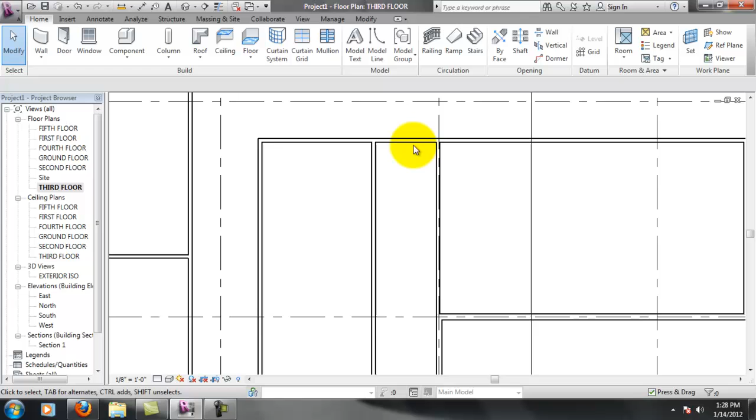Since this isn't really a major corridor, we can empty that. In AutoCAD, if you remember, you could do a trim, or you could even maybe do a break here. There's a couple ways we could approach this. We can drag this dot to this line, or we can split this, delete this segment, and trim this segment. It's probably the best two ways.

Probably the proper way to go about doing it is to make sure you don't mess up by dragging. Sometimes when you start dragging, you mess things up on accident. So the best way to do this, I think, is by using the split element, and I'll split that anywhere in between there and there. I'll split it, then select this extra segment and hit delete.

And then I'll trim this. Trim's a little bit different than in AutoCAD. In Revit, when you trim, you just select the two corners you want to keep. You don't necessarily select a boundary. So I'll select that and that line, and that'll trim that.

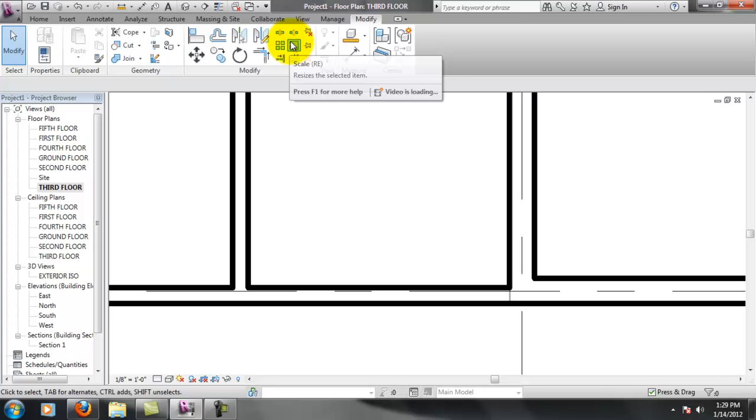Okay, so again on this one, we're going to use the split tool anywhere in between here. It doesn't matter, it could be here if you wanted to, just as long as you're splitting that line. Then you delete the one you don't want, and use the trim tool to select the corner you're going to keep, and that will give you that open space there.

Again, we can make this opening somewhat smaller, maybe 6 feet or so. It's not necessarily the public route. This outside edge here is more public, and we'll experiment what to do with this later.

So that means we're good up to here. We'll keep this as how it is. We'll change this room—closest seems to be 20 feet. Let's make that room 20 feet. That room should still be 21.6. Okay, good.

This arc we'll go ahead and refine and make it an even number. Nobody likes crazy numbers like this, so we'll say that 50 feet is pretty close to that. So we'll make that radius 50 feet.

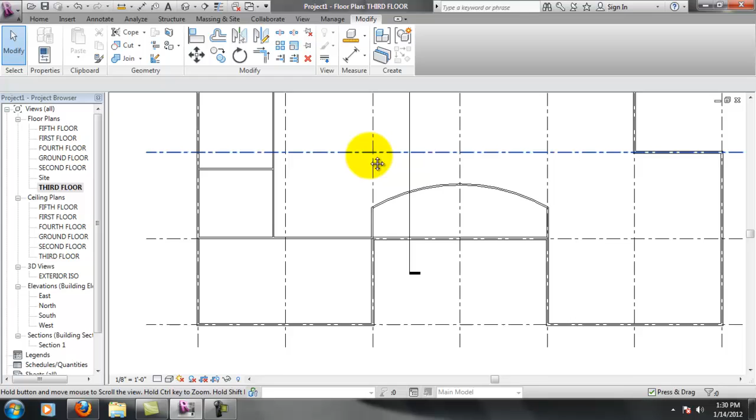So yeah, that's starting to come together somewhat. I'm going to go ahead and save this. We're going to stick with these walls for now, and we'll fade out here. We'll come back and add some doors and windows, and that'll be it for this exercise.

All right, so just a quick recap. We've done a lot in this video. We went through the grids, the levels, and we've started with the exterior and interior walls. We've even introduced the idea of sections so we can see our progress as we go. I can throw that section in there now, and you can start to see that third floor where we're starting to add interior walls. Revit helps us by creating these views, where AutoCAD would take much longer. Obviously if we had custom stuff it would take time up front, but we're using generic stuff now, saving time on upfront work. We're just placing stuff to get used to the idea. We'll refine that later with custom wall types, doors, and so on.

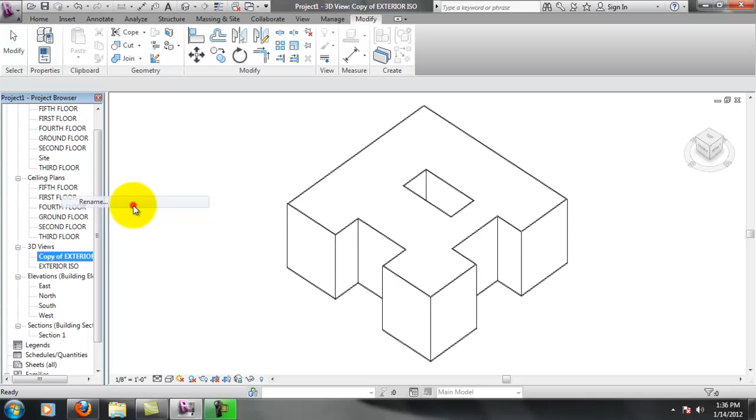I right click on this, go to duplicate view, duplicate with detailing. It's going to give me a copy. I'm going to rename this as third floor exterior ISO. This tells me that I'm interested only in the third floor exterior ISO.

So in order to do this, I need to start hiding some stuff. In Revit, you can select elements and hide them, and there are a couple different ways to hide elements - temporarily or permanently. If I want to temporarily hide something, I can select it, and down here you'll see this icon with the sunglasses. If I select that and hit hide element, it will temporarily hide that element. You can tell I'm temporarily hiding something when the screen changes this way. This means it's only temporary. Anytime I come back, if I go to the 3D view here, it's still temporary - it's not a permanent drawing thing. If I click on this and hit reset, it'll go away.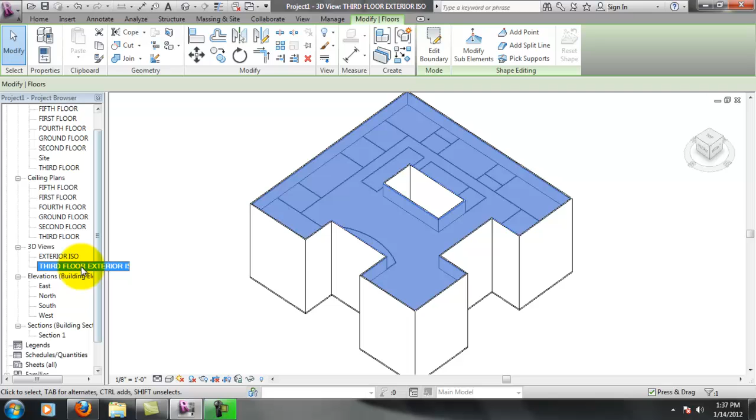Now if I want to permanently hide something corresponding to the view - remember, each one of these is its own view - so if I hide something in a view, it hides it permanently on that view. If I select this object, and I want this to always be hidden because I'm only worried about the third floor in this view, I never really need this. So in that case, I right click and hit hide in view elements. Notice nothing comes up here now - that's permanently hidden. It's undoable in the future if you want, but it takes extra steps. It's not like I can just come down here and hit the sunglasses.

So what you're seeing here is actually the wall lines on the next floor, so I need to get rid of this fourth floor as well. I need to find a spot that when I highlight it says floors, and I can click that and hide that element. So again, hide in view elements - there are the walls for the third floor. Remember this exterior is the original; we made a copy, and now we're able to hide things dependent on that view. Anything I hide that's view dependent only relies on the view I hide it in, not the original view or any other view. So this one's still intact - the other floors are hidden on this one, so I can see my third floor walls now. It's a cool feature, being able to hide things to see different levels, so we can see that our progress is going well.

So let's go ahead and start dropping in some doors. This video is getting a little longer than the others, but this is the basis of Revit - there's a lot to accomplish here, so there's a lot to cover. I want to make sure we get a good, solid understanding. All right, so we're going to focus on this area - there are some places where we can really use doors and windows. So go to the Home tab, go to the Door tab.

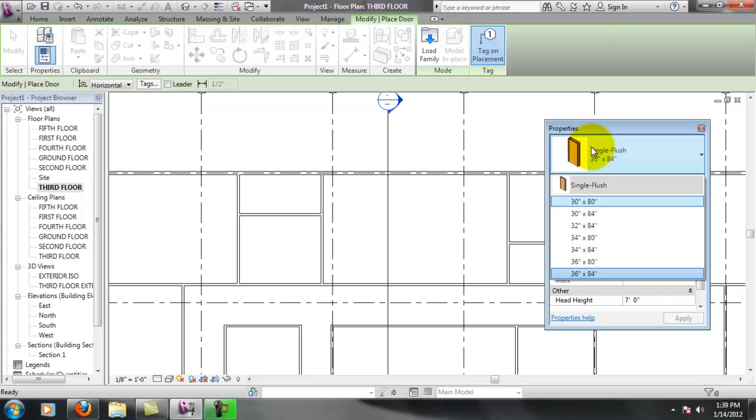By default, Revit loads the single flush family. This is considered a family of doors, and the name of that family is single flush, just like a last name. You'll find there are different families for different door styles, which would be the siblings of that family. Within a family you can create as many different sizes, or kids, as you want, depending on what you need.

Obviously a 36-inch by 84-inch door is standard, a 3-foot door that's 7 feet high. That's pretty typical. Here's a bit more of a specialty 80-inch door, still 36 inches wide, and some smaller doors. Usually you wouldn't go any smaller than that, and if you went bigger you might consider a double door instead. We'll focus on creating our own door families in the future, but for now just realize these are the standard ones.

Now Revit gives you more than just a single flush door. Sometimes you want more than just a single flush, since that's really boring and simple. So if you want to see what else Revit has, notice there's a Load Family option. I'll select that and go to Doors. Here are all the other families, which you can think of as other last names. These families are going to have children even more defined than the door type itself, so there will be different door sizes for double flush, just like single flush has different sizes.

If we pick something a little more fancy, let's see if there's a panel door here. We should have a single panel. So instead of just having a flush slab like before, this door actually has panels, and you can see different orientations of panels on these doors. There's just a bunch to choose from. These are the ones from Revit, but you can even make your own based off of these if you want to.

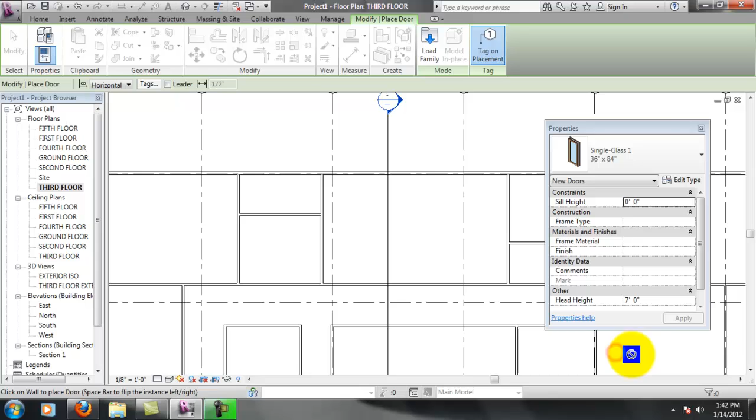Now you can see that loads in here. It doesn't get rid of the fact that single flush was already open either. As you open these, they'll collect in the properties box under this drop down for things you can use in the future. So my single flush door is still in here, but I also now have the addition of this glass door. I'm going to select 36 by 84 and close my properties panel for now.

Now you'll see when I come out here and hover over the walls, it automatically drops the door in. If I move up to the north of the wall, it gives me the door swing in. More to the south, it gives me the door swing out. For this case, I'll just put the door there for now, clicking these in without worrying about the exact orientation or placement just yet.

You'll notice right off the bat it's dropping these door tags in, which if you've been through construction documents you might already understand. If not, you'll learn by the end of this class that they're extremely important. We don't necessarily want to get rid of them, but we don't want them visible right now either. Think back to the concept of floors and views — we didn't want to delete the floors, just hide them. In the same sense, we don't want to delete these tags, we just want to hide them.

So in this entire drawing, I don't really want any tags. What I can do is select one of these tags and right click, hide in view, but instead of elements, I'm going to select category. By selecting category, it's going to hide any door tag that's in this entire drawing from showing. Now, if I just did element, it would only hide that one single door because that's considered an element. So if I want to hide all of the elements, I've got to hide the category. I'll hide category, and you'll see all of them disappear.

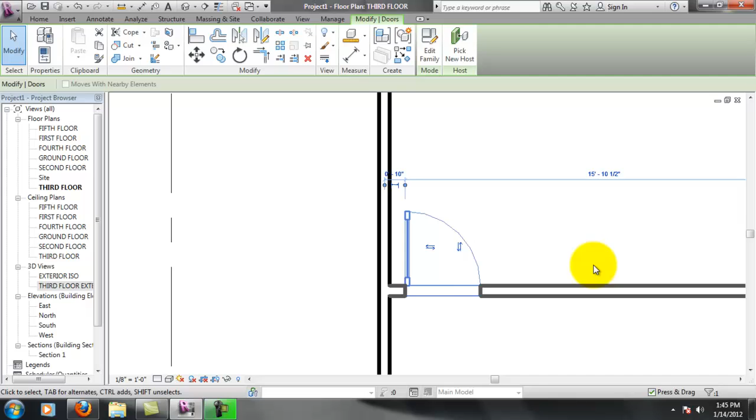We typically find 2 feet is a little much for the back side of the door, depending on your design. For me, I like to keep it nice and snug, so I'll probably leave enough room for the door trim and some little extra space, so I might leave 8 to 10 inches here. But again, it depends on the designer and what you want to do.

So you can see when I click on this, it's measured to the center of the door, but I know the dimension from here to what I kind of want to leave here. So I'll drag this so that it's flush with the back side of the door. Now my measurement, including the inside of the door, is 10 inches. That gives me about 8 inches.

Again, if I wanted to flip the swing of this door, I could. Technically, whenever you get into the building code situation, this door may have to swing out that way. I doubt that door would - it would just depend, I guess, on the codes. For now, we're not really worried about that. We'll just create our doors to make them look great.

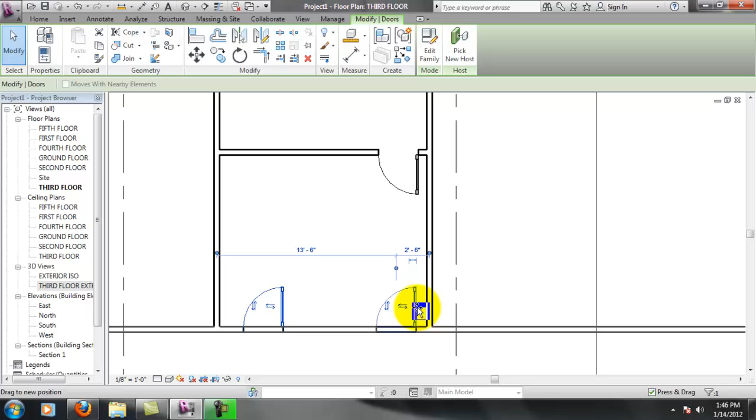So this door, we'll go ahead and leave swinging out, but we'll move it over. I'm going to just drag this, click and hold, and move it over till it aligns. So if I wanted these doors to always be aligned, I could use my align tool here. That way, if I move one door, it moves both doors.

So if I go to Modify, Align, I want this door to be aligned here, so I select the center line of this door, and then I select the center line of that door, and you'll see that it locks those doors in place. What that means is if I come in here and change this door, notice it's bringing the other door with it. That's a good example of how the align tool works - it locks things in place to work off of each other. So the align tool is extremely powerful when it comes to parametric data.

Alright, so let's do one more door here. I'm going to add a double door for this, what looks like would be a conference room. So again, I'll go to Home, I'll go to Door. The door that I want isn't loaded yet, so I need to hit Load Family, hit Doors. I'm going to do a double glass door with maybe some panes in this one, some lights, and once that loads, you'll see there's my double door.

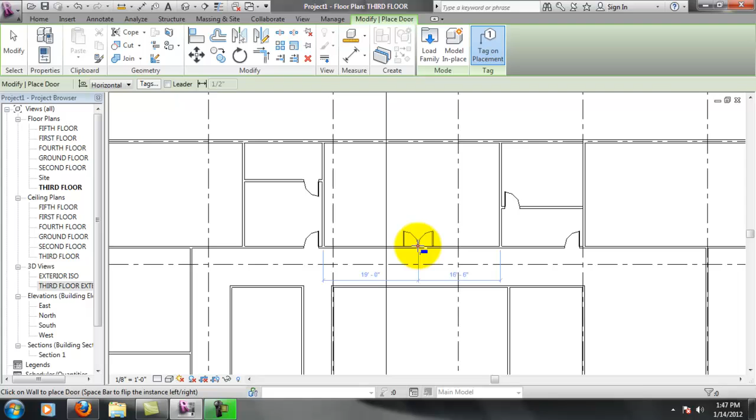I'll just click anywhere there, select my door, and place it wherever makes sense. I'm using my arrow key to nudge this over. So I can nudge stuff with my arrow keys. Looks like I'm not going to be able to get it exact without maybe 17'9", but we'll leave it at this for now - 17'10" and 17'8".

Okay, I know that a section view exists. This is going to get in my way, so I'm going to select it. Right click, hide that in view by elements so it's not in my way anymore. Notice my section view is obviously still accessible down here. I just don't want the section marker there right now.

So there's the section of our third floor. And if we jump to the third story, we'll see that those doors are being placed in there, nice and neat. There's my double glass door, my single doors. Hold shift, remember I can orbit.

So that shows you those doors there. Windows are added the exact same way, so I'll add the windows and we will call it a day. Let's see, if I go to third floor we'll focus on these areas here.

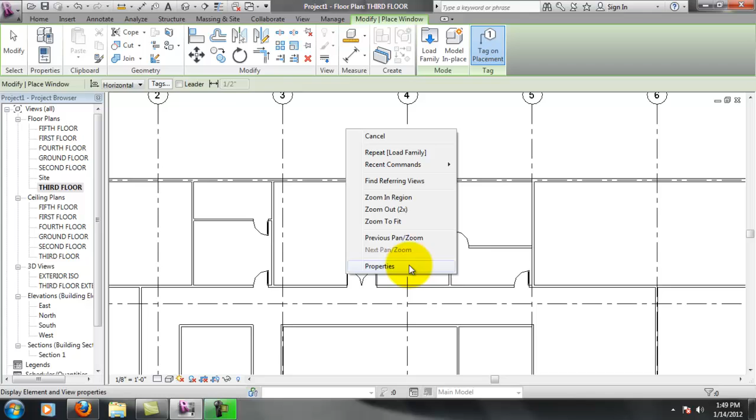I'll select windows, we'll go to properties, and we'll see that a really plain fixed window is in there now. This is a commercial building, so technically it's probably going to be some kind of crazy glazing where it has a glass shell - we don't actually have 8-inch walls. You really probably won't see, especially on the upper floors, any windows that are going to open. But let's go ahead and take a look at some of the windows under the window load family here.

So these are all the windows offered by Revit, the default windows. And obviously we can create custom windows as well. So fixed is open now - see, fixed with trim. So we'll just go ahead and work with what we have with the fixed window here for this.

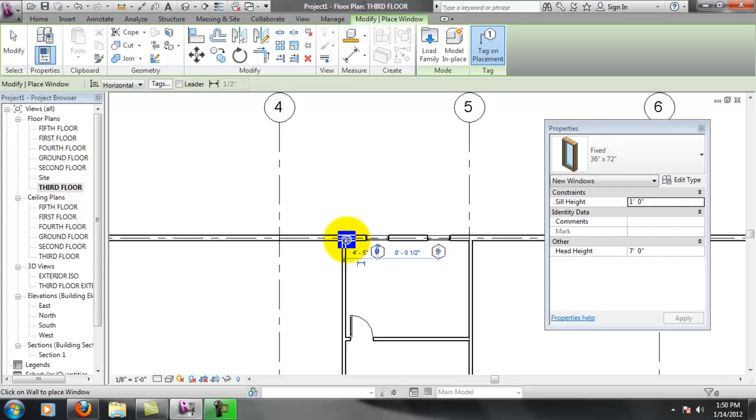I'll make it as big as I can, 36 by 72. And it's just as simple as clicking, just like we were doing before, maybe a couple windows a room. Notice that Revit's automatically placing these window tags, just like door tags, so we treat those the same way. We want to get rid of all window tags, so you just select one of them, go to hide in view by category, and that'll get rid of all those. Now, when you look at these windows, you should notice one thing.

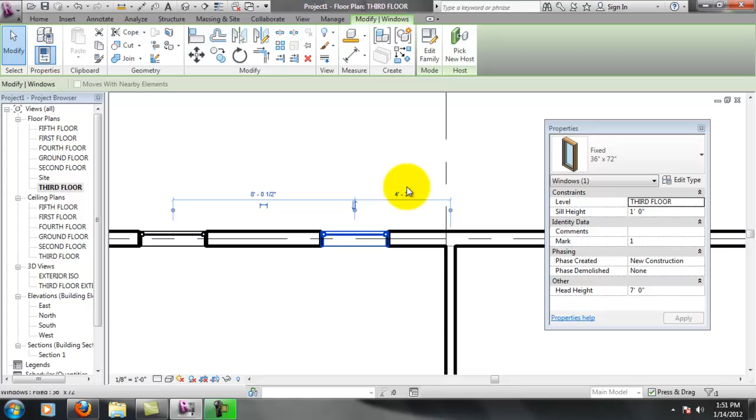They're actually backwards. When you think of a windowsill, usually you have more space on the inside than you do the outside. And it all comes down to the actual window, so you need to flip those the other way. Do that by selecting the window and hitting the double arrow. There we go. And you place these the way that you would place anything. That's good - I'm not too worried about where you place your windows here, just worried that you actually place them correctly with the correct orientation.

So I go to my 3D view now. You'll see those windows are placed in there on the outside of the building. So you can see Revit's a powerful tool when it comes to this, because when it comes to drawing elevations, that stuff is going to already be done for you. You're not going to have to focus on it. All this stuff's already going to be done for you, so it's just more work up front.

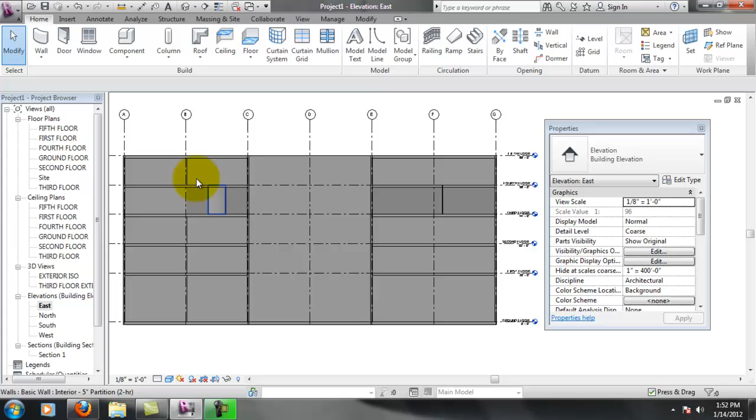So switching to my shaded view there, it actually looks like we're cutting in there. We shouldn't be cutting in there, so let's take a look at that. There's the wireframe view. Hidden line.

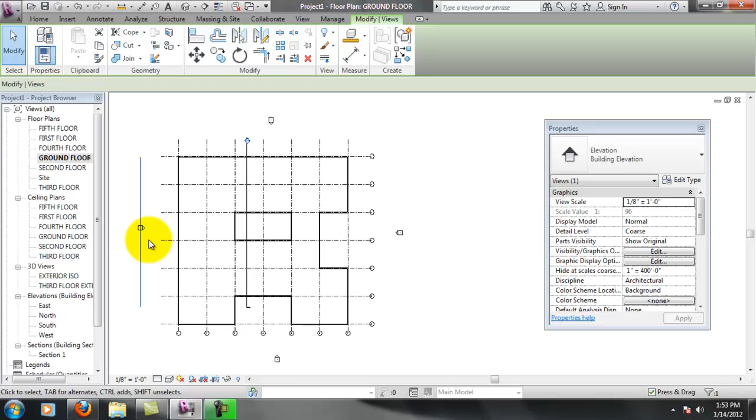Okay, see how we're cutting in? We're seeing floor levels - we shouldn't be seeing floor levels in elevations. So to fix that, you need to select your elevation triangles and make sure that your blue lines are actually outside the building. This one's way inside, it's no good. So we want to move those outside.

There we go. So now we don't see the floor levels, we see our windows in that elevation from the outside. And that would be correct, as opposed to what we were seeing before. Here we see the little in and out of the building in the elevation. So powerful tool, Revit. We're going to get to know a lot about it. I want to just give you the introduction of this.

So you're going to need to go through this, create everything you see as you see it. I'll make sure to type up the formal exercise sheet as normal, but this should at least get you somewhat started. I think it's pretty self-explanatory of what you actually need to do. Just follow along.